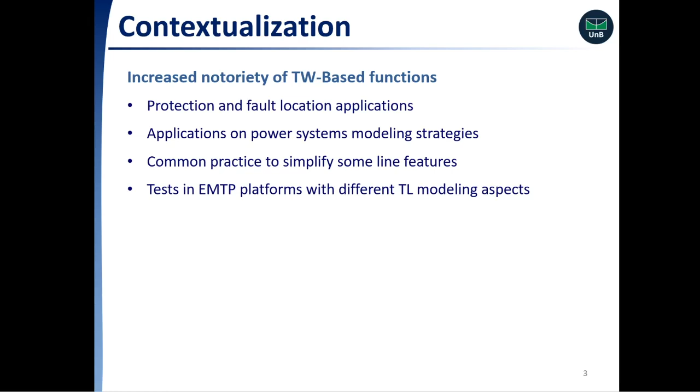Although the literature offers a substantial amount of studies that evaluate TWFL solutions considering different fault conditions and system models, the impact of combinations of different line EMTP modeling strategies is scarcely addressed. So, aiming to fill these gaps, studies considering these modeling aspects are performed, investigating their respective impacts on TWFL solutions.

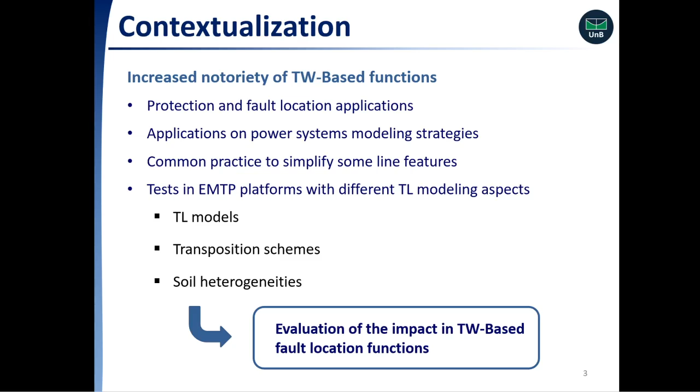Based on the TW phenomenon, several traveling wave fault location algorithms have been developed, and some depend only on the first incident wave detection, while others depend on the proper identification of waves reflected from the fault point. To better understand this principle, the diagram below represents fault-induced TW propagation on the given line. The monitored line connects the local bus to the remote one.

L is the line length, D is the fault distance from bus 1, and T11 and T21, for example, are the instants at which the first incident TWs arrive at buses 1 and 2 respectively. The waves can be reflected or refracted, and the instants they reach each terminal are given in the diagram. With these time instants, several TWFL algorithms can be developed, and in this paper, the evaluated techniques are four.

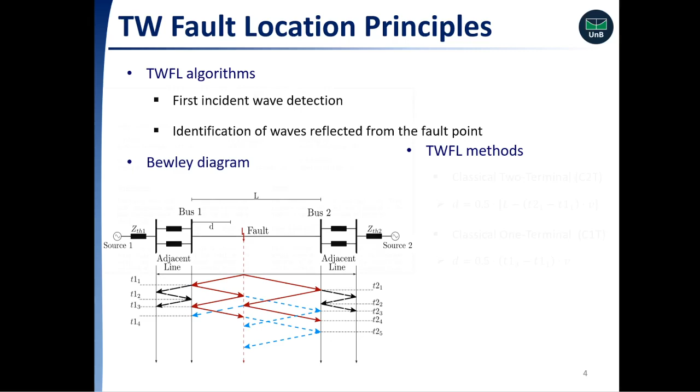Classical two-terminal and one-terminal methods, proposed in this paper. The classical two-terminal needs only the first incident traveling waves at both line terminals and the propagation velocity, while the classical one-terminal needs the first and the fault-reflected TW at the monitored terminal.

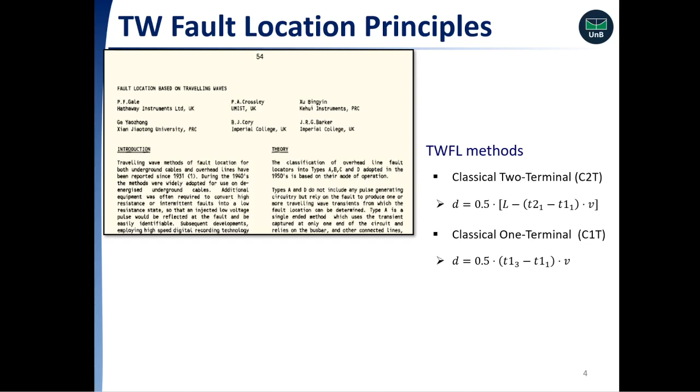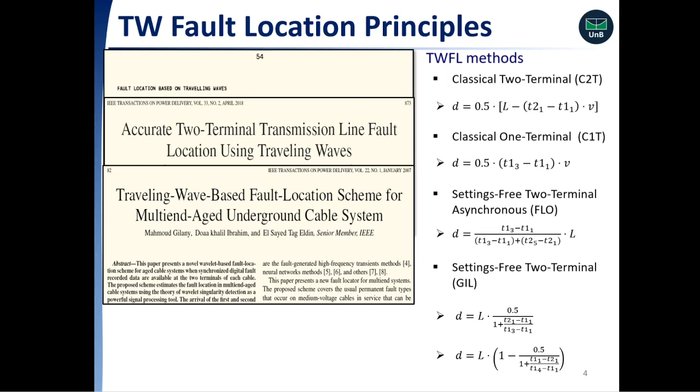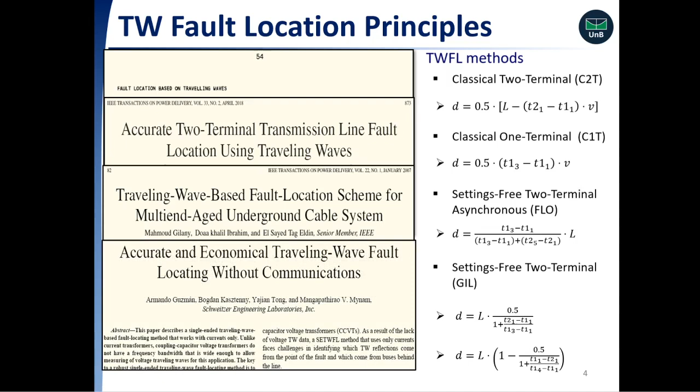Settings-free two-terminal asynchronous method proposed by Felipe Lopes, and also the settings-free two-terminal method proposed by Gilany. These other two methods require the first incident and fault-reflected TWs to be detected, and to obtain the reflected TW from the fault point, the methodology reported in this paper is applied here.

This is also the line used for the paper. The line length is equal to 235.27 kilometers. The adjacent line length is equal to 70 kilometers, and the system operates at 230 kilovolts and 60 hertz.

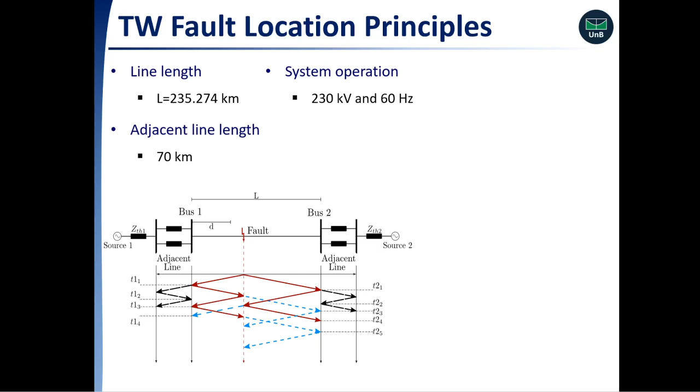To obtain these instants, it's important to decouple the signal by means of modal transformation in order to avoid misinterpretation between aerial and ground modes. So Clarke's modal transformation is used for this purpose, decoupling the signal into aerial modes TW1 and TW2, and ground or zero mode TW0.

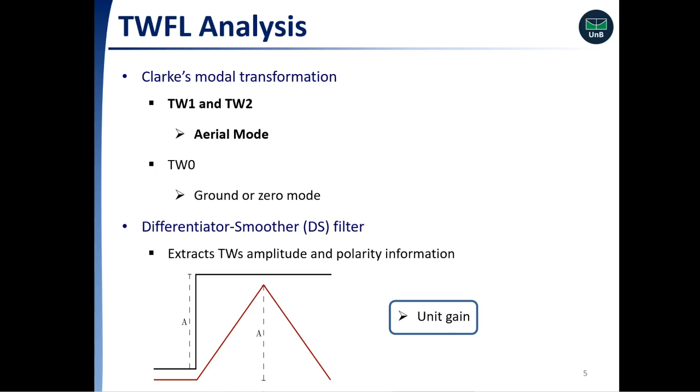Only the aerial mode is used here, and the next step is to apply the differentiator-smoother DS filter to the aerial mode signal to extract the TW amplitude and polarity information by converting fault-induced step-like changes into triangular-shaped outputs as depicted in the figure, and the DS filter also has unit gain.

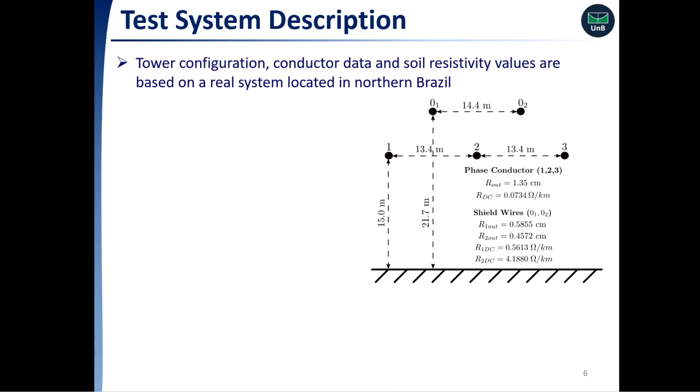Tower configuration, conductor data, and soil resistivity values are based on a real system located in northern Brazil. The tower configuration and conductor data are illustrated in this figure. 8 systems have been modeled and simulated in ATP, considering the frequency dependence of line parameters, with constant-parameter Bergeron and frequency-dependent J. Marti line models.

The line is modeled as ideally transposed, considering a mathematical process that keeps the mutual coupling between phases equal, and is also modeled with real transposition, using ATP transposition blocks to connect the untransposed sections with lengths equal to 1/6, 1/3, 1/3, and 1/6 of the total line length.

In addition, the line is modeled with an equivalent soil resistivity, homogeneous soil, and also with a non-homogeneous soil, in which the soil resistivity values vary longitudinally, resulting in 4 distinct resistivity values shown here in the table.

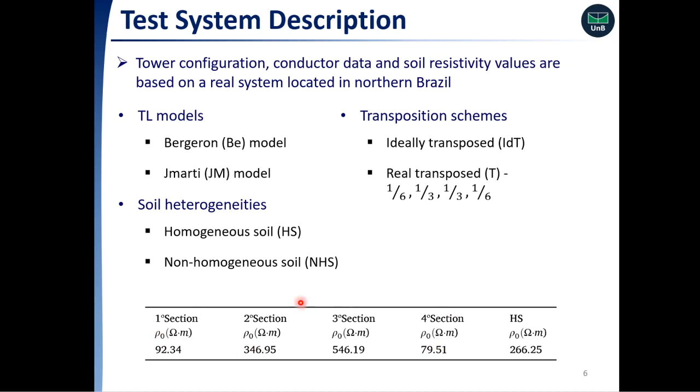So the first table describes each evaluated power system scheme, system 1 being considered the most simplified model, whereas system 8 is taken as the most realistic one, and system 1 is always used as the reference for comparison. For each system, the propagation speed was obtained by line energization simulated in ATP, considering this formula, in which tau is the estimated propagation time.

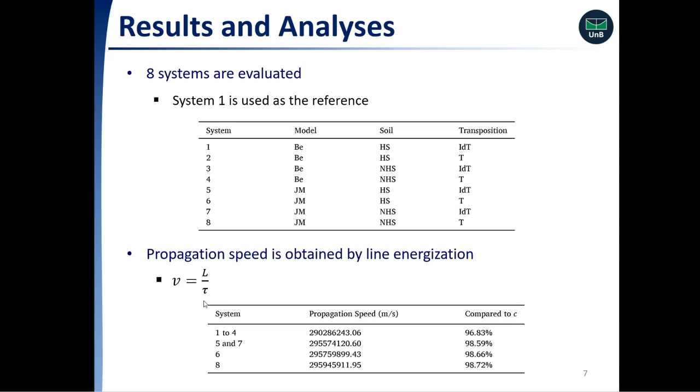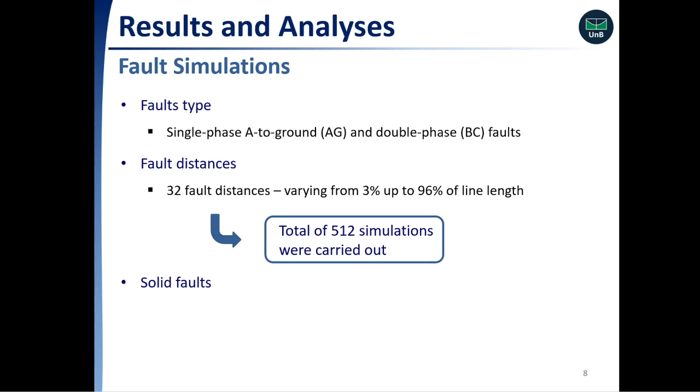Single-phase A-to-ground AG and double-phase BC faults are simulated, considering the fault distance varying from 3 up to 96% of line length, resulting in 32 fault distances. And as 8 systems were simulated and 2 fault types were taken into account, a total of 512 simulations were carried out, and faults are assumed to be solid.

Here, 3 studies are carried out based on the obtained scatter plots, analyzing each variable individually. So the scatter plots present a coincidence diagonal, which represents the region on which both evaluated systems present similar performance, and 2 areas: above, the pink area, in which the modeling simplifications in system 1 increase the TWFL errors, and below the coincidence line, a yellow area represents scenarios in which the modeling simplifications in system 1 decrease the TWFL errors.

And this analysis showed that non-homogeneous models do not significantly affect the studied TWFL methods, since most points are on the diagonal coincidence line, and all evaluated methods are based on aerial mode TWs, which are slightly affected by soil characteristics.

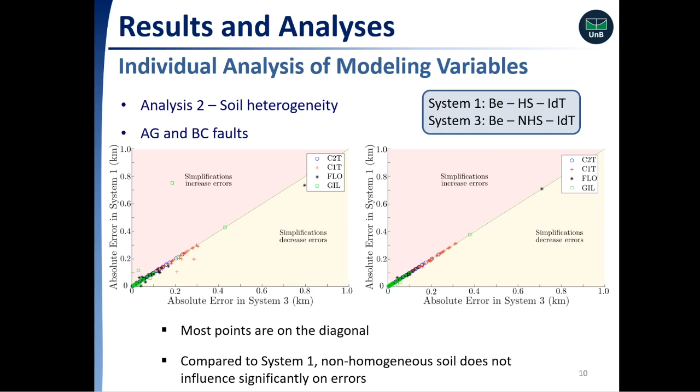And in this part, 2 different line modeling characteristics are combined, maintaining the remaining feature fixed, and then all the 3 evaluated modeling aspects are combined. These figures show the impacts of transposition schemes and soil heterogeneities simultaneously, comparing system 1 and 4. The performance shown in the figures is very similar to the cases in which the real transposition is considered. This behavior is expected since the non-homogeneous soil has shown to be not critical to the evaluated TWFL methods, which in turn depend only on the analysis of aerial modes of traveling waves.

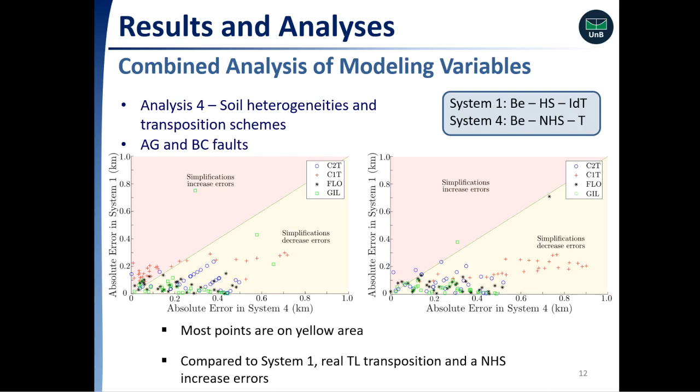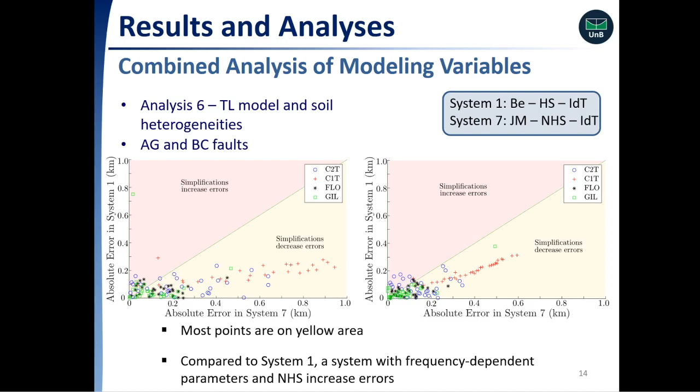Due to the mixing mode, it is also observed that the obtained errors are more dispersed here than in the individual analysis for soil heterogeneities, demonstrating that the non-homogeneous soil model also raises errors when JMARTI is taken into account, whereas for the Bergeron line model, the soil structure does not present relevant impact.

And the last analysis is performed by combining the three variables, contrasting system 1, considered the most simplified model, against system 8, considered the most realistic model. Most points take place in the yellow area, which is a behavior which attests that more complex line modeling indeed poses more difficulties in TWFL methods performance.

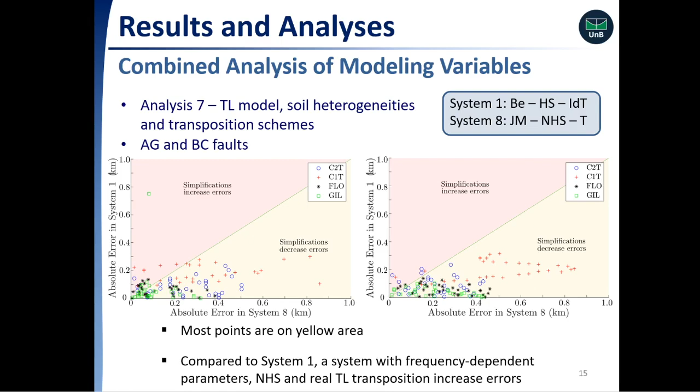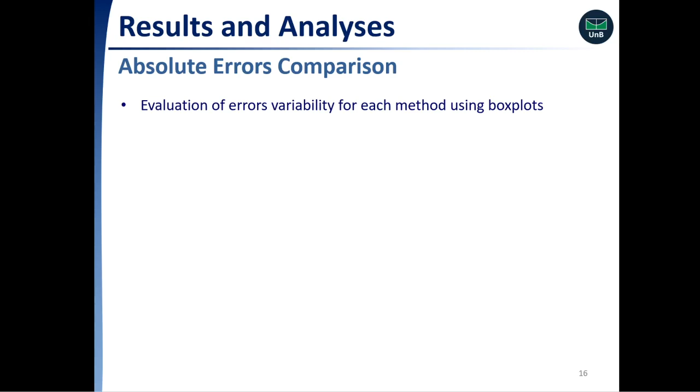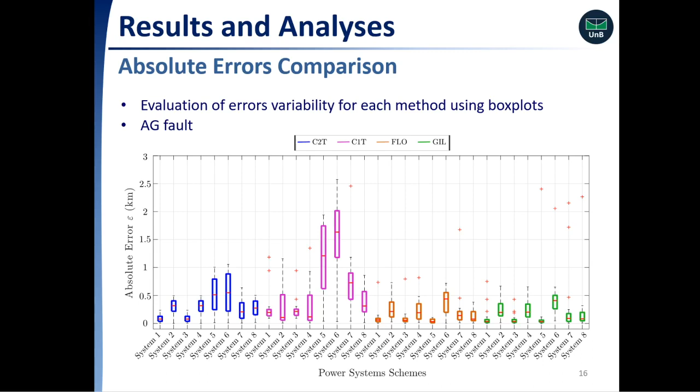Now, box plots obtained from the TWFL absolute errors are analyzed to evaluate the error variability for each method. For an AG fault, it's observed that the median is below 2 kilometers for all cases. Also, classical 1 terminal presents larger errors due to the challenging procedure of identifying the fault-reflected TW. It is also observed that the impact of frequency dependence on traveling wave fault location errors is more relevant in classical 2 and 1 terminal algorithms. It is also observed that the systems with even code numbers present larger errors than those with odd code numbers, which proves the effects of transposition schemes.

And for BC fault, the median error is below 1 kilometer for all scenarios. And also the third quartile in general is lower than for AG fault. Here the increase in errors due to transposition scheme is emphasized in all techniques. The even code numbers correspond to the transposition schemes.

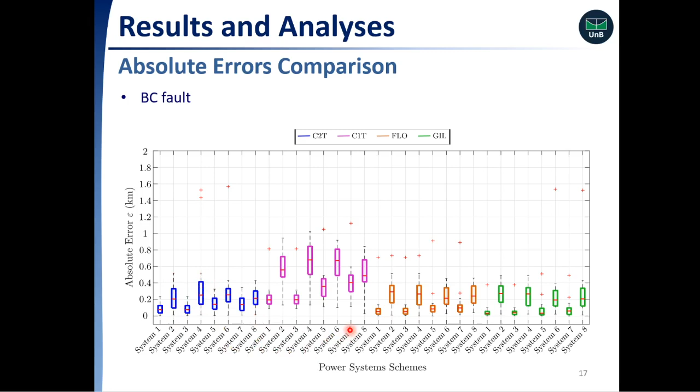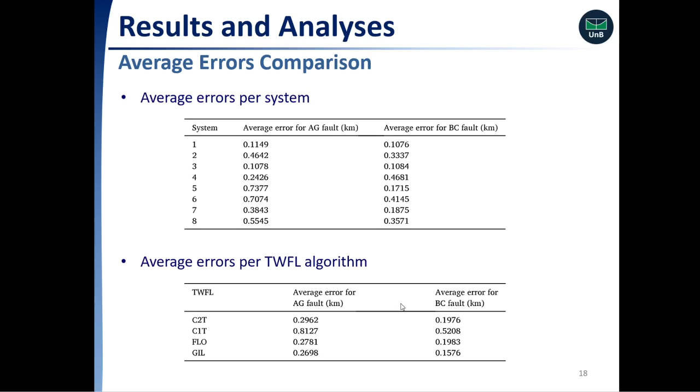Average errors are presented for each system here and for each evaluated traveling wave fault location algorithm. And in fact, observing both tables, double phase faults tend to present lower average errors than single phase to ground faults. It is also noticed that more complex system models tend to result in larger errors, but this is not a rule. In addition, the second table confirms that reflected TW detection is a source of errors, as well as that algorithms that do not require line electrical parameters contribute to a more accurate fault location.

As conclusions, the more simplified the line model is, the smaller the absolute errors are, except for the soil heterogeneity when using the Bergeron model, which consisted in the only case in which additional modeling complexity did not result in larger TWFL errors. And TWFL methods can be affected by different line modeling strategies, pointing out that some features can favor or compromise the performance results, and how in a real-world scenario it is expected that power systems will present characteristics close to those verified in the most complex system model.

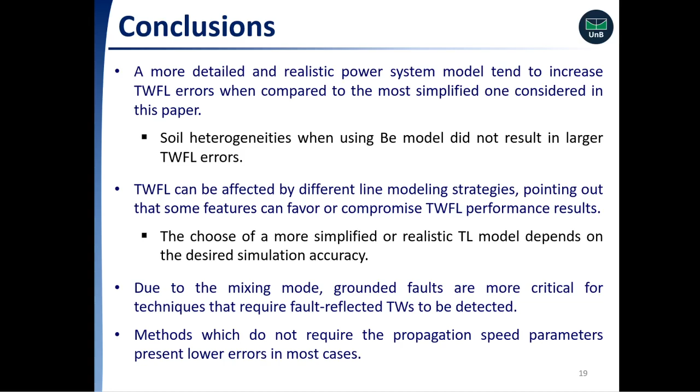Considering this paper, the choice of a more simplified or realistic line model depends on the desired simulation accuracy. Also, due to the mixed mode, grounded faults are more critical for techniques that require fault-reflected TWs to be detected. And finally, methods which do not require the propagation speed parameters present lower errors in most cases.